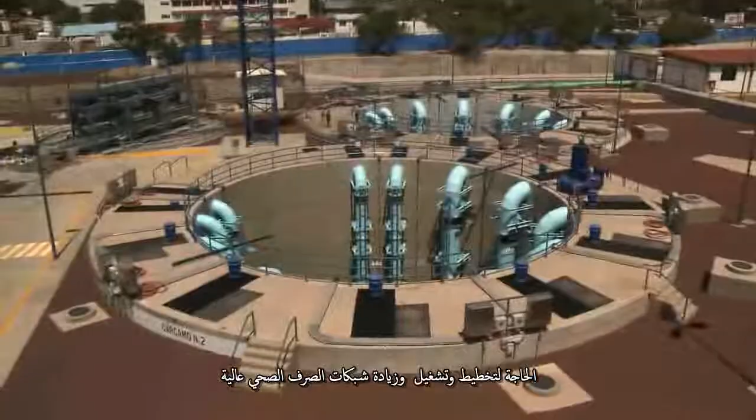A targeted and preventive planning approach is therefore needed for urban development. The demands placed on the operation, planning and extension of the wastewater and sewage networks are extremely high. Large investments in this area are meant to sustainably improve the quality of life for the metropolitan region's 22 million inhabitants. In spite of the many challenges, the inhabitants' joy of living is remarkable.

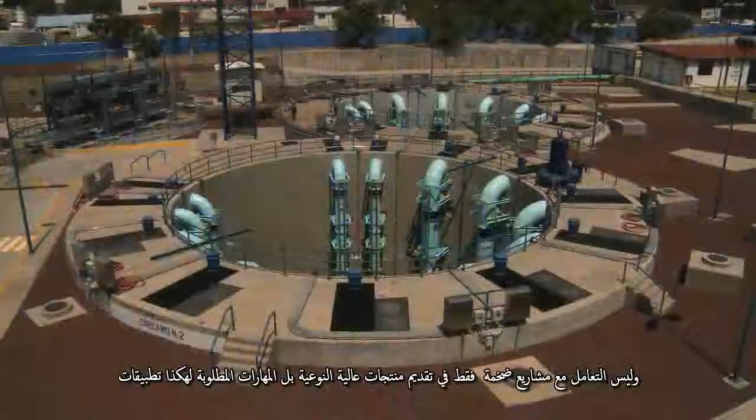When planning had reached an advanced stage, KSB was also asked to provide assistance as an expert in hydraulics and project partner. Yet handling such a large project is not just about delivering reliable pumps of high quality, but also having the skills required for this special kind of application.

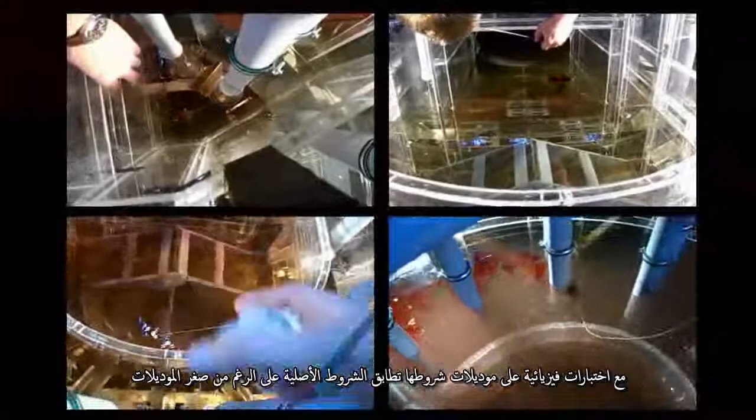The design of the pumping station, especially in terms of hydraulic functionality, was proposed by KSB, with a CFD calculation for the station, which was proven to be effective with a physical model test. KSB ensured that all required parameters were met in spite of the small diameter of the sumps.

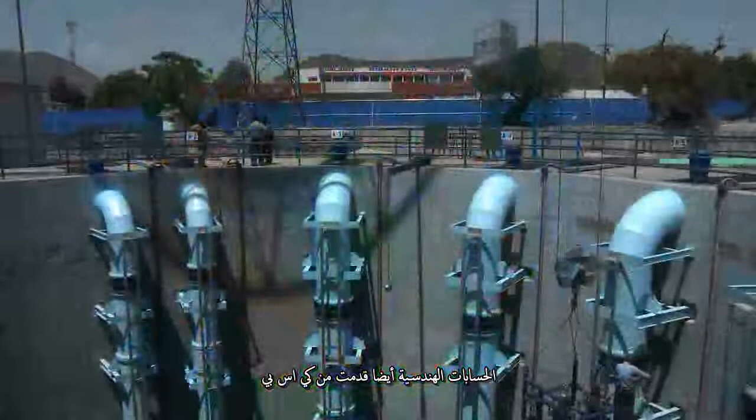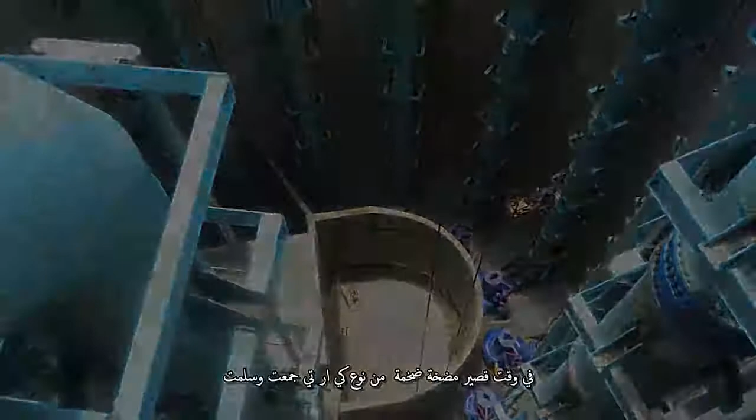The engineering of the piping layout with all calculations was also provided by KSB. In cooperation with the supervisors of the construction site, the customer was presented with a complete engineering package from a single source. Within a very short time, the large pumps of the KRT type series were planned, built and delivered.

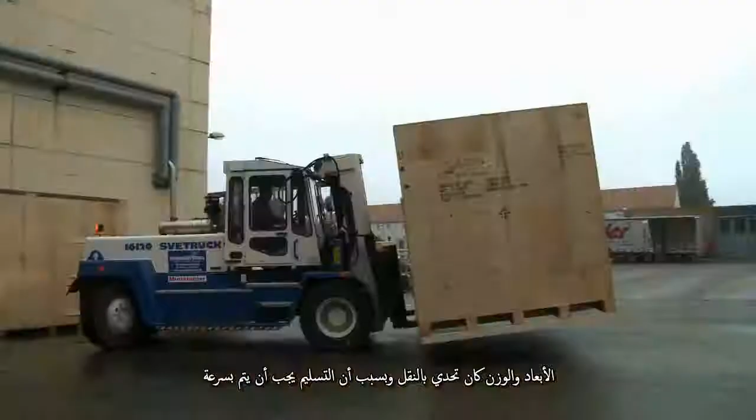Dimensions and weight were a challenge during loading and transport. Because of the pending rain period, fast delivery via air freight was required. To this end, an Antonov AN-124 of the Volga-Dnepr Cargo Company was chartered. It took KSB only a few days to organize the pump's entire transport, including advanced negotiations, the plane, trucks, papers and customs.

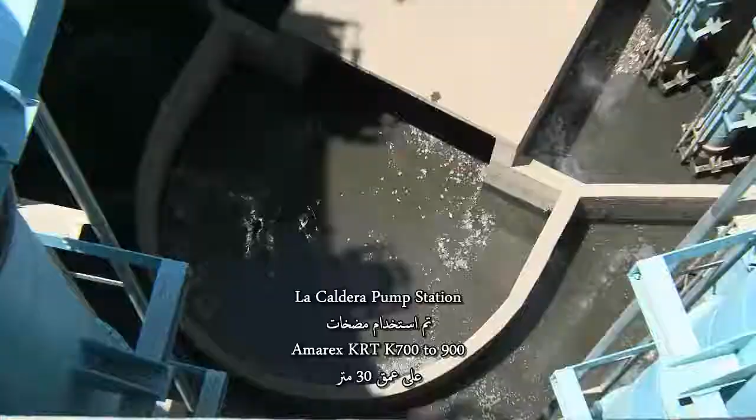The La Caldera pumping station in Mexico City. Here, KSB pumps of the Amarex KRT K700-900 type series are employed at a depth of more than 30 meters.

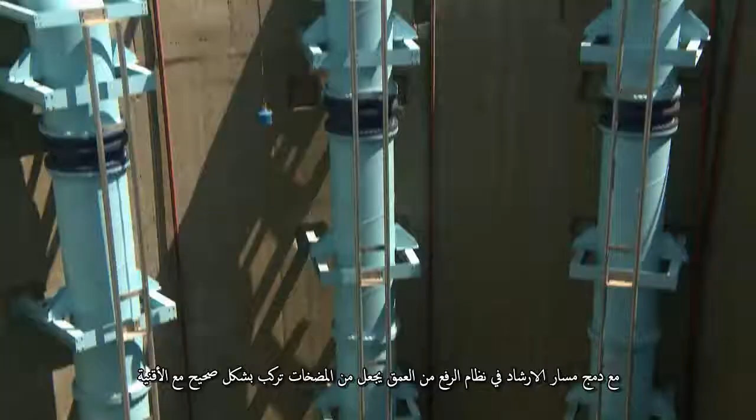The integrated siphons are exemplary in terms of using energy efficiently. A combination of guide rails and KSB's deep lift system ensures that the pumps are installed and connected correctly with the duckfoot bends.

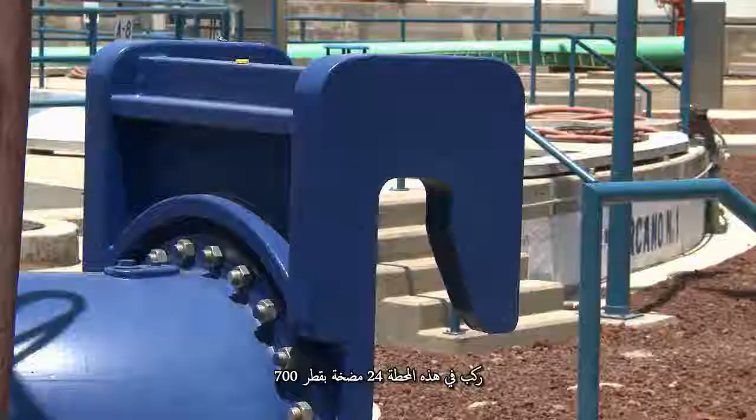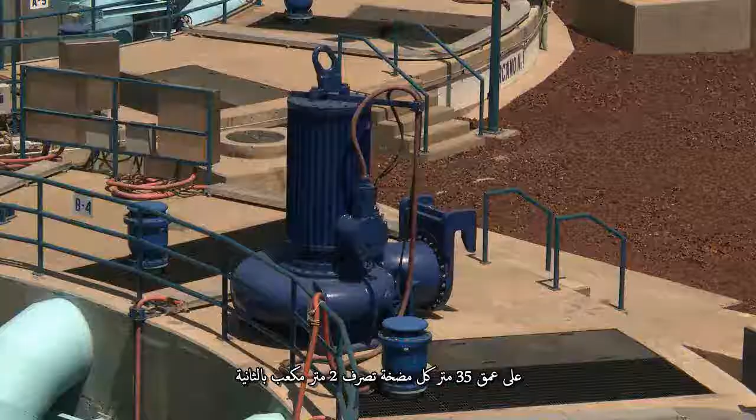The La Caldera station is equipped with 24 KSB pumps with the nominal diameter DN700. In the event of heavy rainfall, up to 40 cubic meters of water are handled in 1 second at La Caldera. At a discharge head of 35 meters, each pump delivers a flow of 2 cubic meters per second.

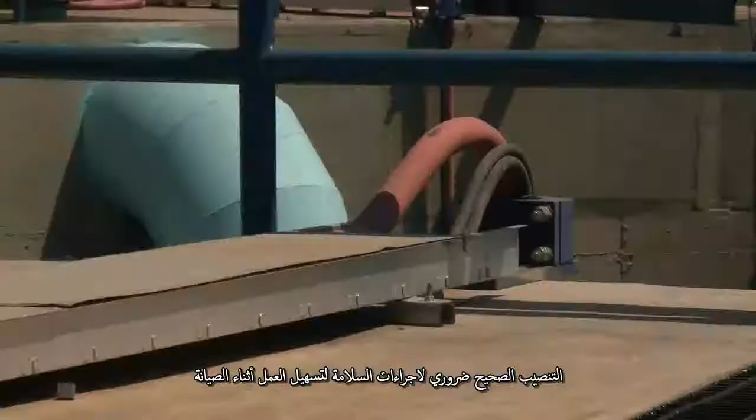Proper installation and fixing of cables is a prerequisite for the safe operation and easy handling of the pumps during maintenance work. Any power losses are avoided by a seal at the pump flange.

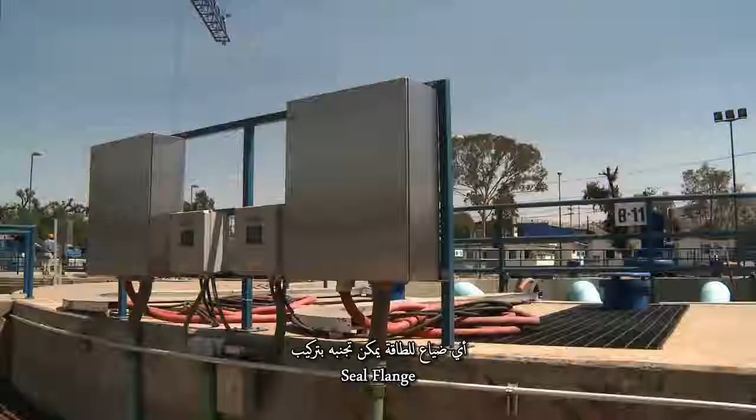The control cabinets of the pumps were also delivered by KSB and are integrated into the whole system. In critical situations, an emergency power supply provides the station with the energy needed, using diesel fuel for several hours of operation on emergency power.

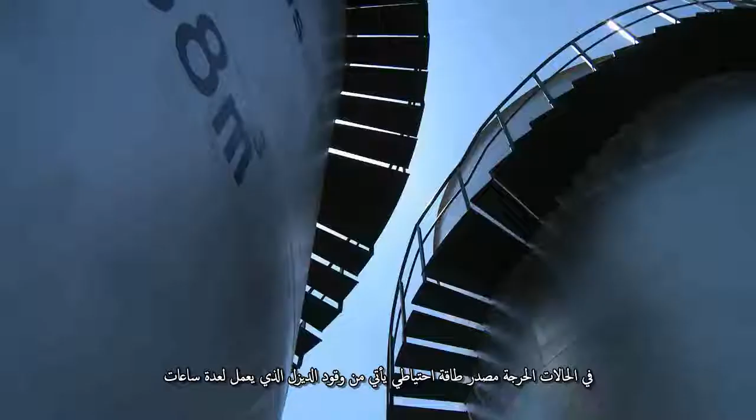The control center of the plant.

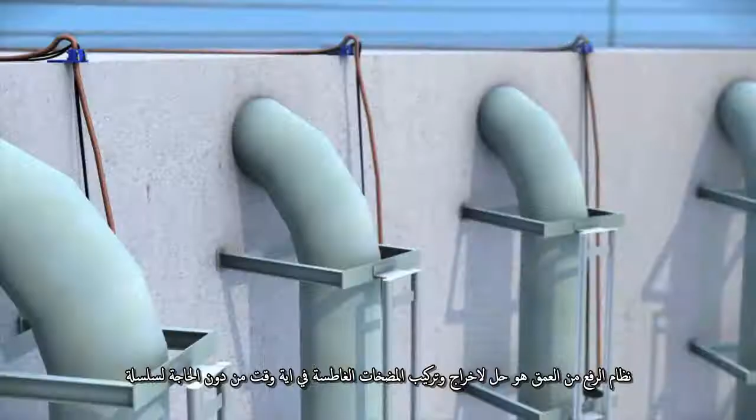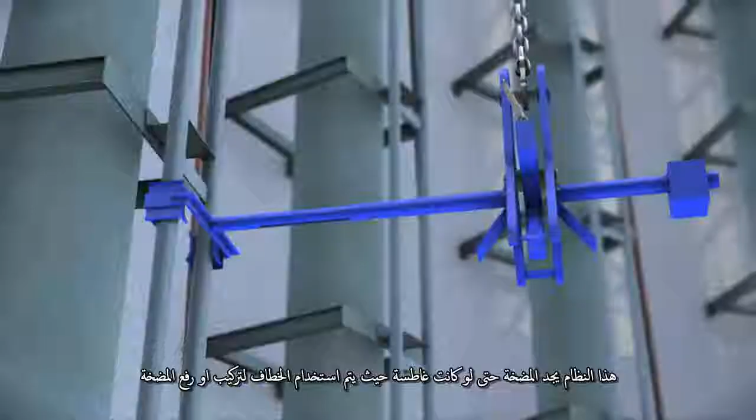KSB's deep lift system is a solution allowing the installation and removal of the submersible motor pumps at any time without the need for a permanently attached chain. The deep lift system independently finds the pump when sliding down the guide rails, even when it's submerged in several meters of water. A hook that closes when subject to a load and opens when it's relieved ensures that the pump is lifted up and put down safely.

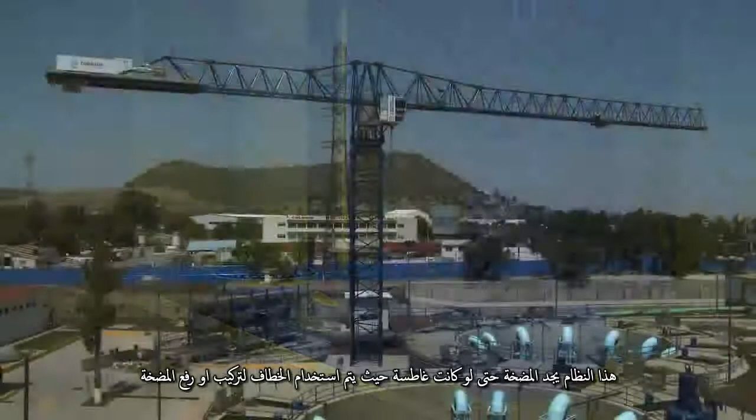Installation work at the piping system performed from a man basket.

In a brief interview, Dr. Carmona explained the focus points of the project.

The most important purpose for us was to solve the flooding situation in that part of the metropolitan area of Mexico City, due to a very fast growth of the population over an ancient lake. For that special situation, we needed the most updated and reliable technique.

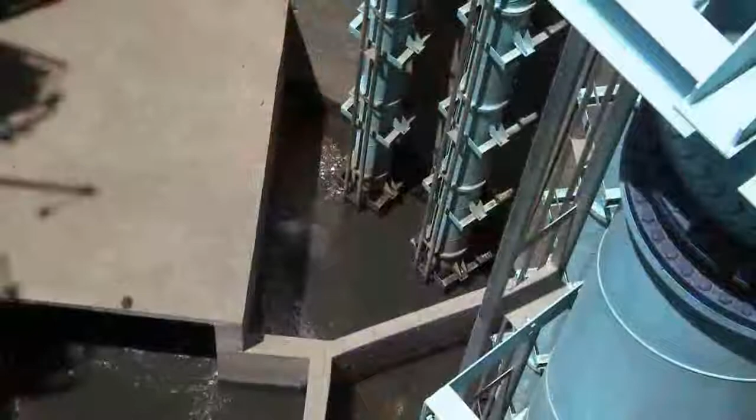The pumping station, designed for heavy rainfalls, is able to handle 40 cubic meters of mixed water per second to avoid flood damage in the surrounding residential areas.

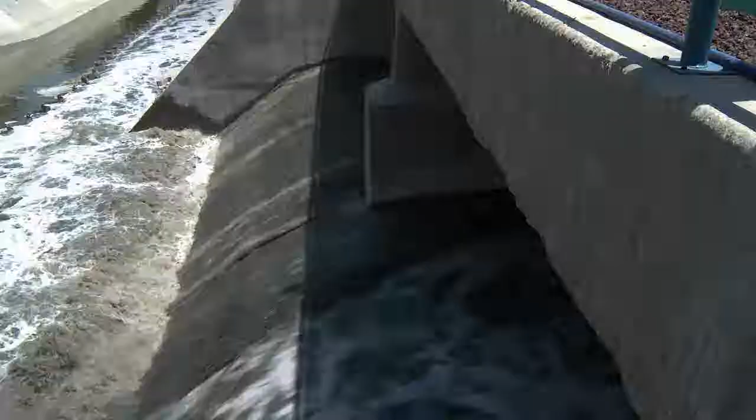New projects in the region are planned to improve the quality of life. For these projects, KSB offers optimum products as well as excellent planning skills and proves itself to be the right partner in this field.